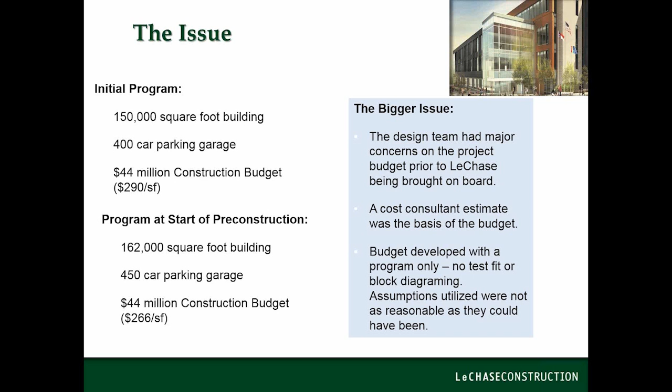So what to do? We looked at Profiler for the solution, and I'm going to go through a little bit about the solution that we came up with to solve the problem in front of us. First off, the documents that were available at that time were some test fit block diagrams from the design team that fit the site. A very extensive program was available.

The budget that we would be presenting, we knew would be highly scrutinized, not only by public interest groups and other public entities, but also by city council, the city management, and others. So we needed to make sure that our product that we presented was very believable and really conveyed the information to an audience that was not just construction and design professionals, but could be city officials, could be residents of the community.

So it was very important that what we presented would be easily understood. So I chose to use a picture in lieu of an estimate detail to show that conciseness and that ability to understand the budget in a visual form, and also knowing that us just throwing a bunch of estimate line items up against a competing list of estimate line items wouldn't really get the essence of where the problem lies, and wouldn't get most folks to understand the bigger problem in a short period of time.

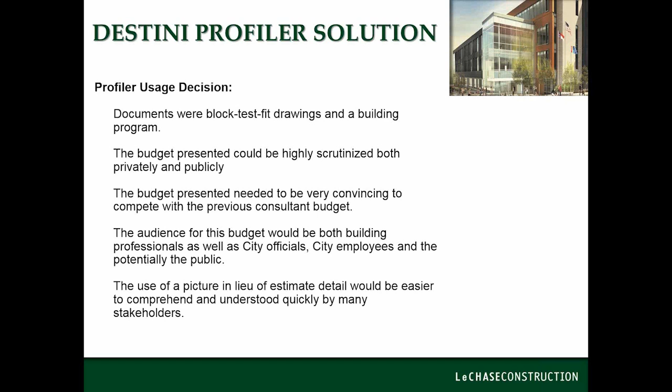So we brought in and started using Destini Profiler on the project. So let's start with some of the documents we had at the time. We started with these test fit layouts of the building. On the left-hand side, you'll see the main building, which is the 162,000 square foot facility. On the right is the parking garage, and what you see there in yellow is areas on the site that they dedicated to future development around this facility.

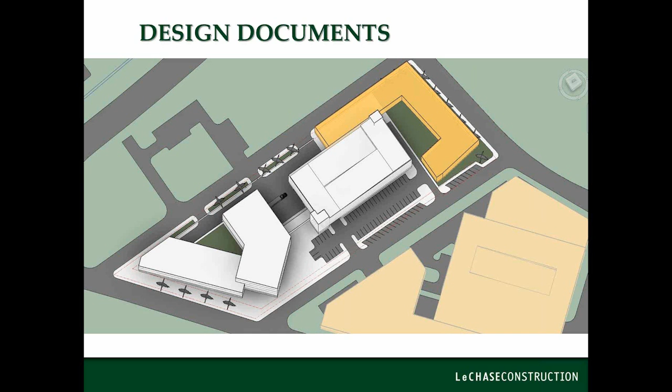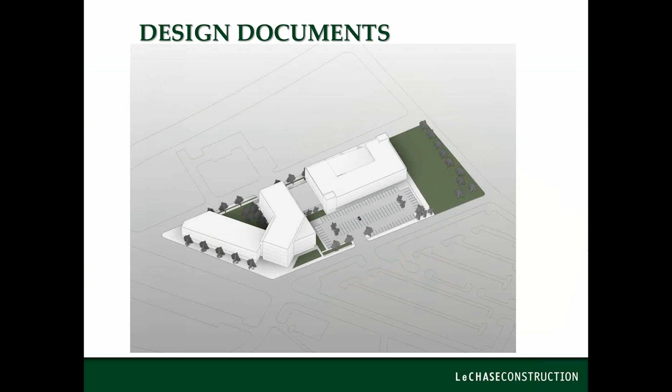The process of getting these test fits approved and through the public and the city was a 6-month affair, and so getting to this point, this is where we started, but also ended up where we finished for the most part. This was a major endeavor and really important to get this right. So this is another view of the project, showing some of the bounding streets in the area, as well as the parking area and the service court area between the building and the garage.

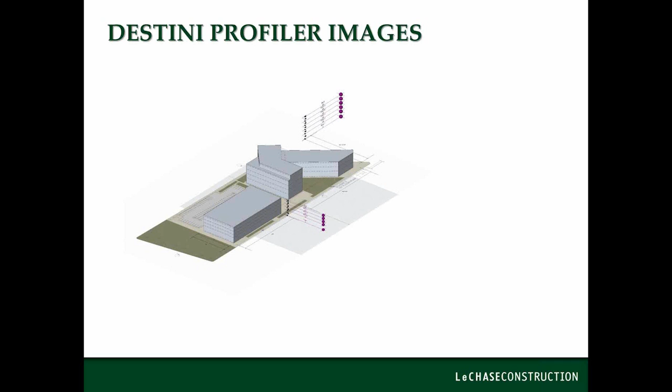Here's a plan view that we were provided. More of the plan view with dimensioning, just to give you some background of what we used to produce the model. And so from that, we produced an early block model. This was the early version of the model I produced, utilizing just really the backgrounds that were shown on the drawings, and then further developed it to focus in on: does it have the 162,000 square feet that they envisioned it to have?

And one of the interesting things that Profiler provided to us was that I figured out very, very early that the building wasn't going to fit on the site. And so you see on this plan view where I had to extend a section of the building into the street to make the square footage work that was in the program. So kind of a twofold benefit here. It not only gave us a visual of the estimate, but it also gave us some insight into the idea that the test fit probably wasn't as accurate as it could have been and needed to be.

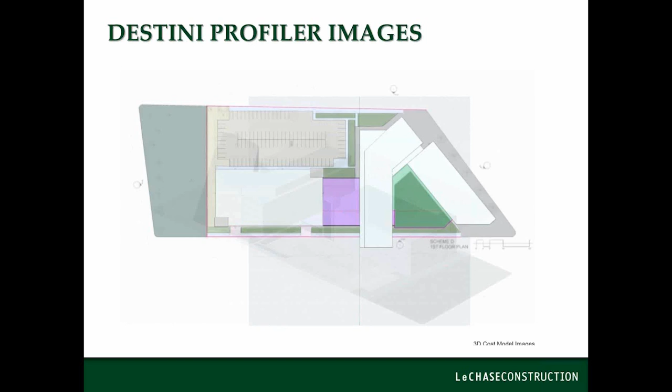More visuals of the model that was produced. See once again the garage on your right, the headquarters facility on the left, and it's bounded by streets on all sides. Another view of the same model, and a very good image showing how we had to extend into the street to make the fit work on the site.

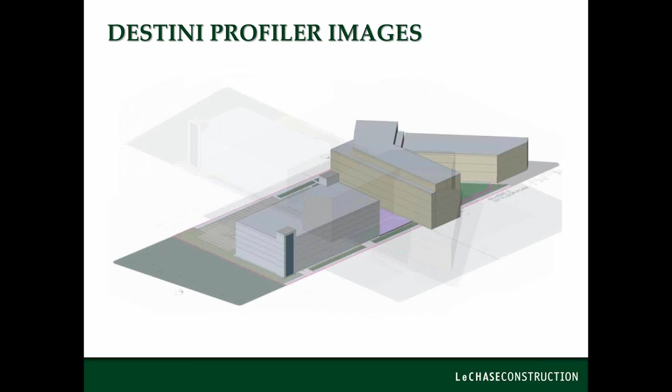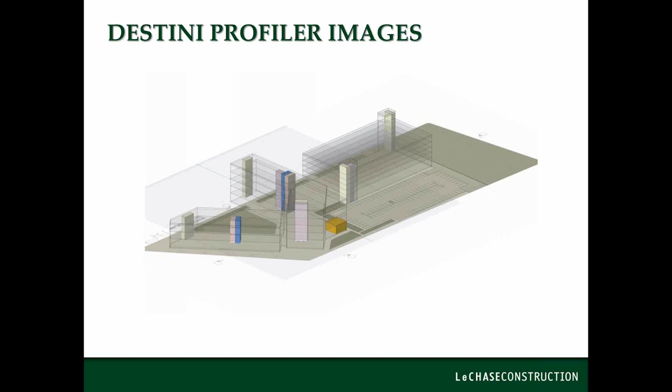More of the same. For actually producing the model, I used a core and shell approach to the project. Did a core and shell model for the main building and for the garage. And then on the interior side, I just modeled the core and shell elements of the stairs, the elevators, the lobby, and the restrooms. And so that's what you see in this wire diagram that showed the core and shell elements. And then for the interiors, put the program information into our Profiler estimate and produced dollars per square foot based on the interiors to produce the final resultant of the estimate.

At the end of the day, our cost model came in at $57 million. Keep in mind our original budget was $44 million, so we had in fact confirmed that we have a big problem. Actually a 30% budget issue, which everyone was very aware would not be overcome by just value engineering this thing. We had to rethink the project a bit, and maybe even rethink the budget a bit. And as you see at the bottom of the page, our cost of the project all in on our cost model was about $354 per square foot of building area across the entire project.

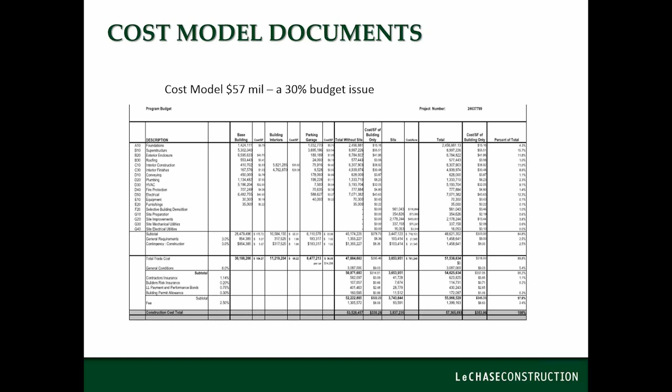So where do we go from here? The first thing we did is we looked to do some benchmarking on the project. Strangely enough, for as long as the project was under planning, no one had done a benchmarking study, either from the owner side or from the programming group side, or even the cost consultant they brought on. So we conducted a benchmarking study to take a look to see what these buildings should cost across the country.

So what we were able to do is we confirmed that the model itself was accurate in terms of the information provided in it, the square footages of materials, unit pricing, that sort of thing through Profiler, and then further confirmed that it's within where it should be and lines up nearly identically to where we would expect it to be based on benchmarking. So all things are going pretty well at this point in time.

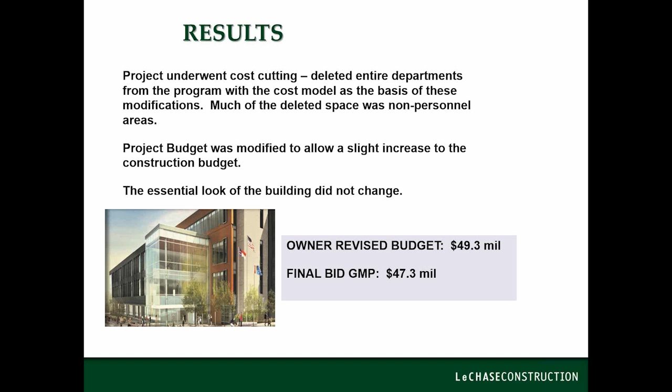Okay, and just for information, by the way, the picture you see on the lower left is the final rendering of what the building looked like. A little bit different in that we were able to expand the lobby area to be this glass feature within that budget. Perfect. And then we do have several questions now coming in.

So how did you continue to use and update the model as design progressed beyond the concept phase and towards the construction documents? Once we established the layout of the building that we were going to be using, we stopped the Profiler process at that point. That was based on the final model, the layout that was approved by the city. And from that, we moved over into our more traditional estimating scenarios, with our estimating systems and formal takeoffs of the actual building.

So the succinct answer is we really took it through the conceptual stage only, which is a belief as to how I use Profiler. I know others go much deeper with it, but I really like to use it as a conceptual tool, and then move more into our traditional applications, and then compare back to that model that we created to make sure that we're on track with that cost model.

Okay, and then a question coming in around the database. So did you use the database in Profiler to create the estimate, or was Profiler more just used to get the areas and a feel for the layout and look of the building? I used a database that I've had for a number of years inside Profiler. So I used it for the image as well as the output, and the deliverable that I presented was essentially images that you just saw of our model, backed up with the printouts of the Profiler estimate, integrated into our standard deliverable product. So I use both the estimating side as well as the visual side.